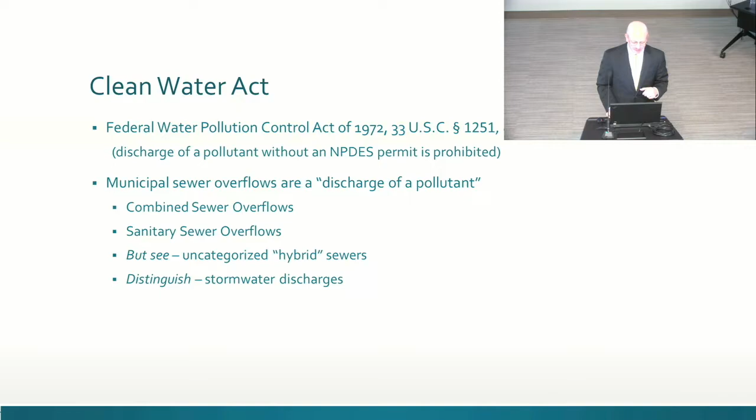Now, here's your homework, and you'll have these slides available to you. So if you really want to drill down into what the legal framework is for this, and you really have trouble sleeping at night, you can look at these documents. These are really the controlling documents for EPA in this discussion. The first was the 1994 National CSO policy that came out as a regulation from EPA, and the next year Congress basically elevated that into the statute of the Clean Water Act by saying all permits and approvals have to be consistent with the National CSO policy.

Combined sewer overflow. Okay, good question. Go ahead and bring that in there. You're going to hear CSO now all the time. The CSO is a combined sewer overflow. So this policy focused on those single pipe systems that are prevalent in all our old cities, again, especially in Ohio.

It was an idea of how do we come up with what can cities afford, how can they figure out what's the best level of control, how much control is enough if you can't keep all the stormwater out, because you can't, right? Mother Nature's always bigger and there's rains all the time and it's infrequent. If you can't keep it out, what should you do?

If you look at that document, you'll see there's something called a presumptive approach, which in 1994 was the agreement, or the way to say if you get to a certain number of activations, limited number of activations, or a certain percentage of volume that goes out, we're going to say you're in compliance and you're meeting water quality standards. So for instance, if you had 4 or less overflows at a particular CSO in a year, we're going to say that's good enough.

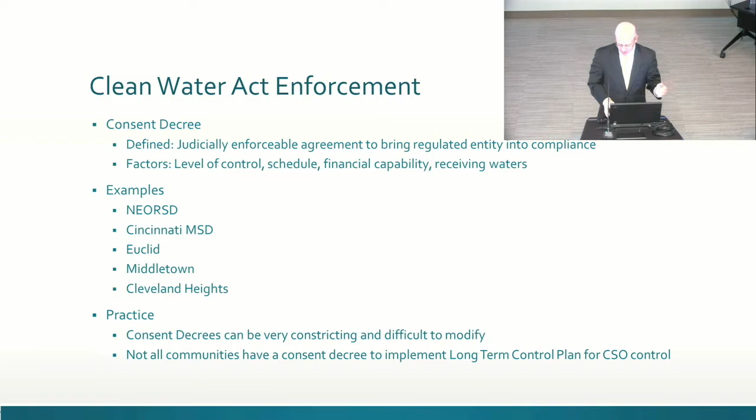Okay, so the route forward. This is critical. This is where the measured optimism comes in. We could choose to do nothing as a public, or just say EPA is going to tell us, but we're not going to like what they're going to tell us, right? They're going to take the most restrictive thing, the biggest projects, and the fastest schedule that they think we can afford. If we come up with a plan through this process, if we get your input and make choices about what we can tolerate, what we like, what our priorities are, then we have the possibility of being able to push back on EPA.

Public participation is very persuasive, especially to EPA and especially to a federal judge, if we're standing in front of one at the end of this process, which is where it may go. So there's really no ability to not play this game, or else we're not going to like the result. There's no ability for the community to vote present and rather not choose. Our route forward is to choose something that we can afford.

And we should all know there's no non-local money to fund these programs unless you have an integrated plan where you can take other infrastructure dollars and marry them up to street projects and water projects, which is what we're talking about. If we can come up with that kind of integrated plan, then we have an opportunity to have something affordable. So this is what we're talking about.

Today, that's probably several trillion dollars in cost to implement. So the issues haven't changed much. I want to emphasize how unique we are. A couple of key points to grab: it was not built as one system, it's an amalgamation of many subsystems built over many years. It was all built in a pre-World War II environment, so the technology was older, and the theory of environmentalism at the time was that the solution to pollution was dilution.

The pollution source was from our homes, and the dilution source was Lake Erie. So public health was the primary objective: diphtheria, cholera, typhoid. Anything they could do to move that water away from the population was a good day's work.

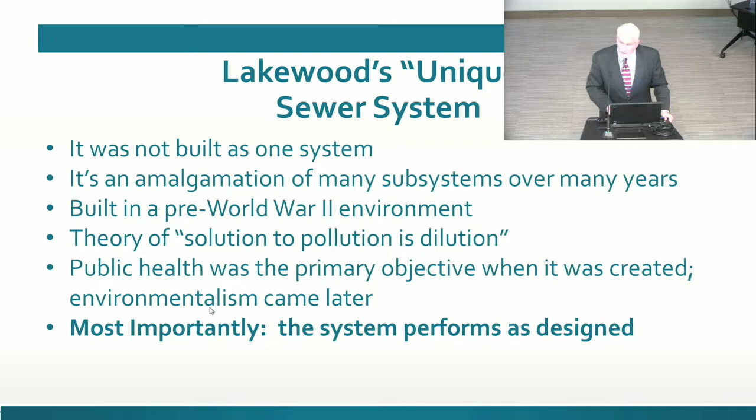Lakewood is actually on a hill. Lakewood Heights is about 55 feet higher than Edgewater Drive. They understood the geology of Lakewood and the opportunity to leverage gravity as a friend here, and they built a terrific system. That system performs as designed. From the day it was built until now, it performs fabulously. The problem is it's illegal.

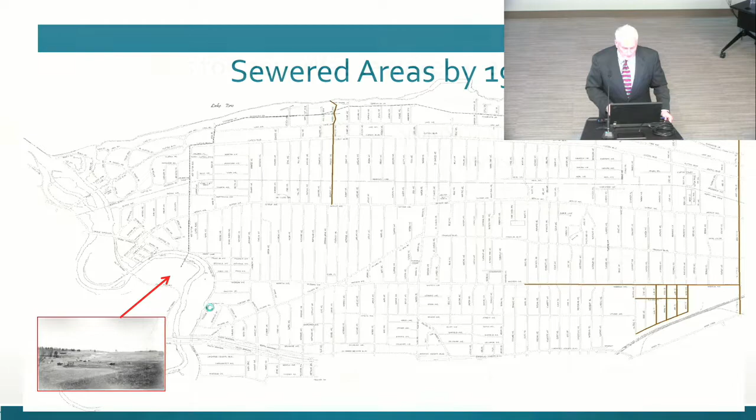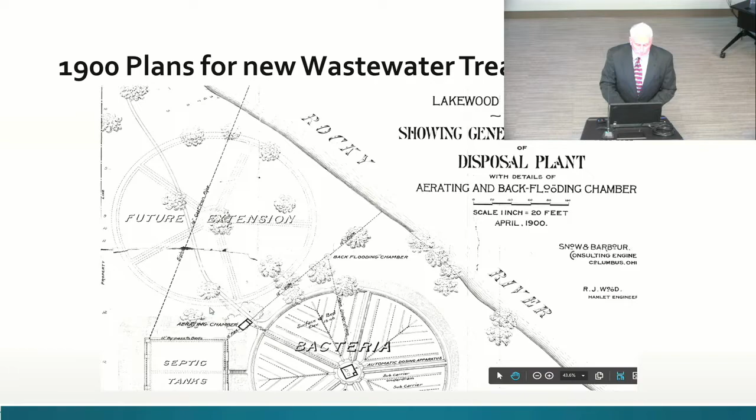So in 1900, they began to realize we need to direct this stuff somewhere, and they began to design what is now our waste treatment facility. It was basically a settling pond. Remember that gravity piece—the question is, how could you get it from high up on the cliffs of Lakewood, all throughout Lakewood, down to this settling pond on the banks of the Rocky River in what is now the Metro Parks. But all that started in 1900.

By 1910, Lakewood was booming, and you began to see some further extensions of this collection system. Again, notice they all go north to the lake and discharge into the lake. It was obviously using gravity. It did its public health job—it got the bad water away from the population.

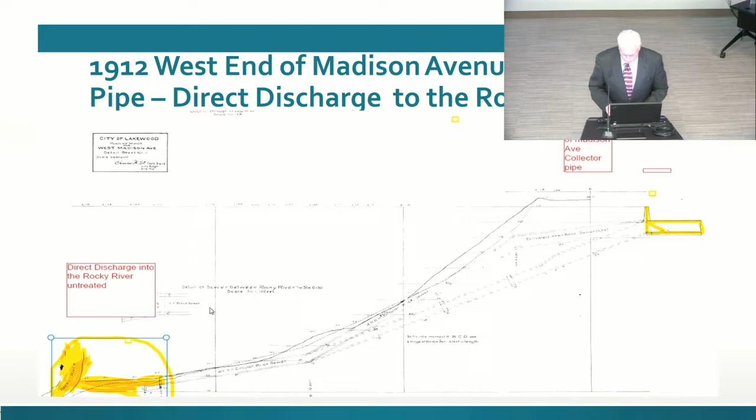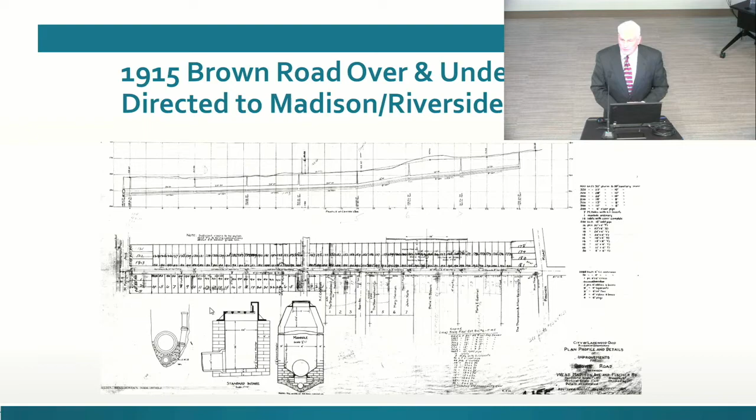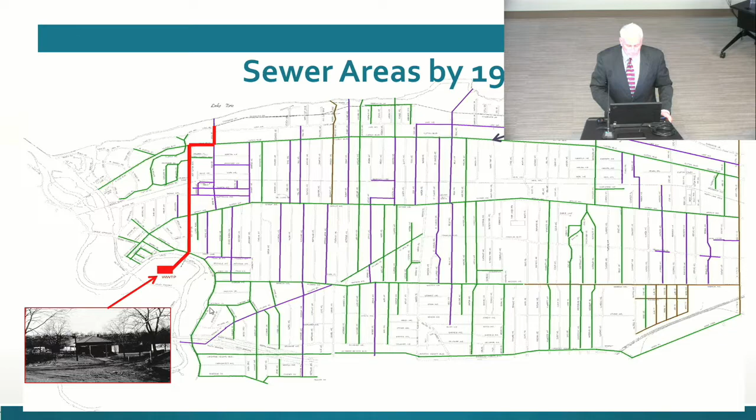By 1920, you can begin to see how things begin to change. That red line shows the first extension of our major interceptor—a larger pipe that begins to capture and connect what historically were a bunch of pipes that went to the lake. They tried to redirect it further west and get it to that plant that was substantially built, starting from the plant and working its way up West Clifton. The colors on this chart represent the tributaries of how water moved through the system—so green follows green all the way up through pipes ultimately to the lake from the middle, and purple likewise.

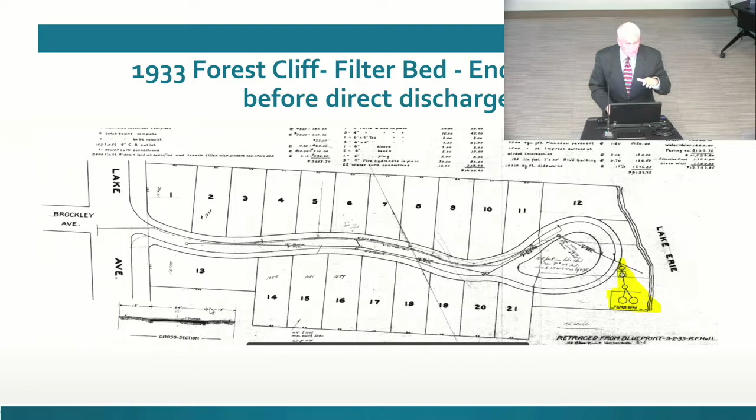So if you lived in 1933 on Forest Cliff, you basically sent your stuff to this filter bed at the cliff's edge, and they tried to filter out best they could, and it went into the lake, untreated. You had these little subsystems all around Lakewood, doing their own thing, achieving the objective of protecting population health, using gravity to get it away, but basically using our lake as our dilution source.

So by 1940, you see a much more evolved system. The interceptor is beginning to extend as well. And then by 1945, you see the final link to the interceptor all the way to 117th.

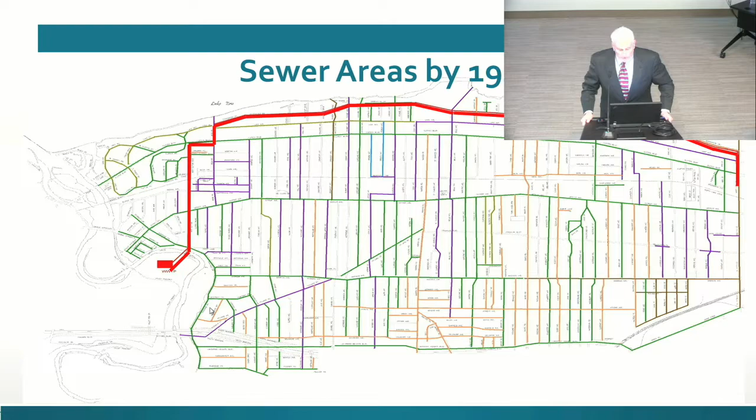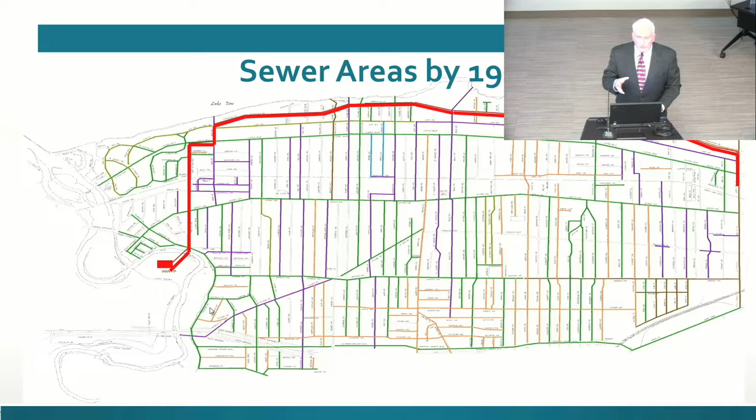So what happens today in a big storm is a drop of water, let's say a cup of water, that falls in Birdtown, by and large, may not ever have a chance of getting to our plant because all the water to the west of it is moving north and west. The whole system begins to fill up pretty rapidly, so a drop of water on the eastern end has no chance. The system is full. It's already discharging into the lake to the west, and that water in the eastern end of Lakewood has no choice but to head out to discharge points, generally along Nicholson and some parts along 117th Street, untreated.

Jim and I live on Wilbert, and our street has its own design issues, but they were built that way. So you get the idea that we now are forced to collect water every day.

Dry weather, by the way, no problem. We have the capacity to collect up to 10 times our dry weather volume, our everyday volume, like today. Dry weather day, no problem. Plenty of capacity in this system.

Our challenge is these big water events, and we know that they're happening more frequently. In fact, I just learned that there have been 27 500-year storms in the last 20 years. I think that's the right parameter. 27 storms nationwide, well, probably across the world, I think. A 500-year event is a storm that should only happen once every 500 years, that's how big it is. And we've had 27 of these in the last 20 years across the world.

So the idea of Mother Nature and her ferocity rearing its head, putting more volume into a system that's not designed to handle it anyway, under the best of conditions, when we have big rainstorms, complicates things. So today, the engineering to fix all this requires us to take a system that was not built as a system and figure out how we can take every drop of water that hits Lakewood under any condition, dry weather, wet weather, collect it, and then handle it responsibly. That's the challenge that the Clean Water Act gives to us.

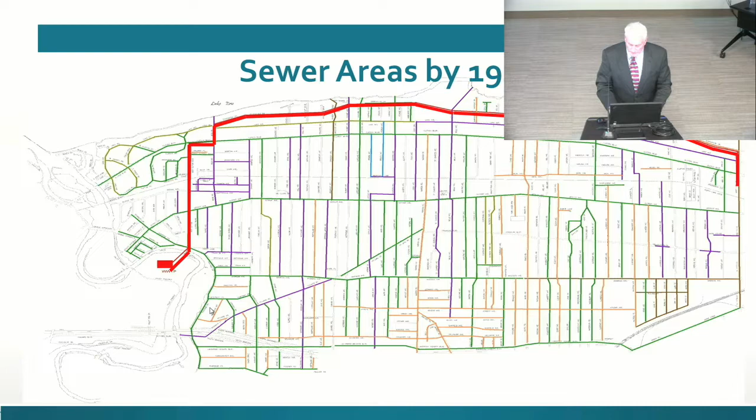And you can get some sense of how we deal with that. Now I show this as an example. This is the discharge set of pipes today at Madison and Riverside. Remember that simple pipe that showed up in about 1915? Well, this is what happens when you try and create a system that was not built as a system. You'd probably flunk a civil engineering exam if you said this is a perfect example of how we design a sewer system.

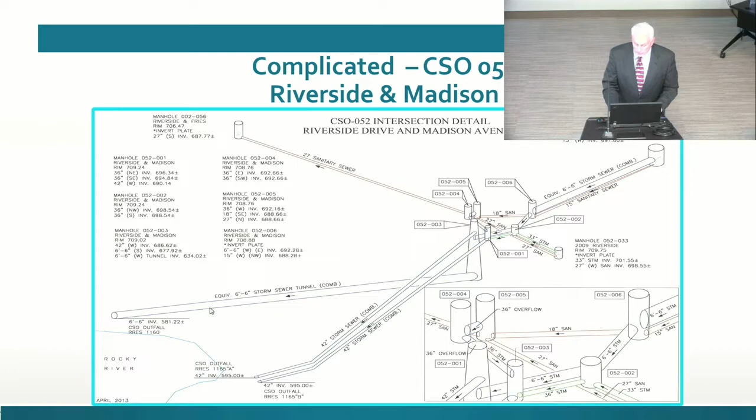But the fact of the matter is you have stuff coming from so many directions and so many different environments. You see this very complex connection to try and get stuff to the right place under the right circumstances. Everything's pretty compromised, and this is a good example of that. This particular intersection is one you're going to hear more about because it's a fairly large volume and it probably has some significant engineering options that we want to grow to understand.

So in the end, we have available to us a very narrow set of choices. We can prevent stormwater from going into our system, which is a function of basically diverting water into the ground the best that we're able. We can minimize its impact through bioretention cells, which we have all over the place, more green space. We can transport and store it somewhere else.

You see these big infrastructure tunnels being built. On I-90 in Bratenahl, they just completed, I think, about a 6-mile tunnel. I think it's 23 feet in diameter, or maybe 43. It's a very large tunnel, and it is basically a big storage tank. It's called the Euclid Creek Tunnel. I think it's about $300 million just for that tunnel. It has a very complex set of pumps because it diverts water that normally would go into Lake Erie into this tunnel while the storm is happening.

The storm goes through, and then they have to pump all this water out gradually and treat it in the normal dry weather occurrence. That's fine if you have plenty of time between the first storm and the second storm. But if there happens to be a second storm that comes along before you finish draining that tank, you got a big problem. You're actually discharging again. And the EPA has no sense of humor about these storage tricks.

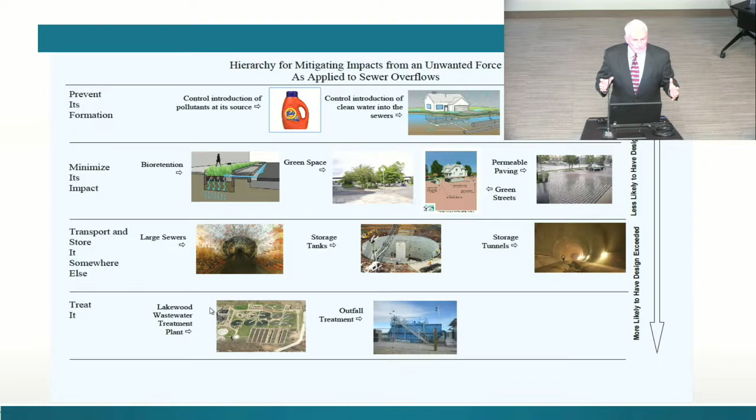So in Lakewood's case, we're challenged to get all our volume to the treatment plant because of all the restrictions in pipes and connections. And then we have the capacity of the plant itself. And we're going to begin to hear how we're going to deal with a lot of these issues.

So starting in roughly 2006, CT Consultants have been extensively mapping and metering, measuring, and modeling our sewer system. They have a very complex computer model that allows us to simulate behavior in different conditions in certain parts of the city. And that allows us to figure out which engineering solutions might work, what the impact would be by plan or by unintended consequences upstream. Do we create further problems?

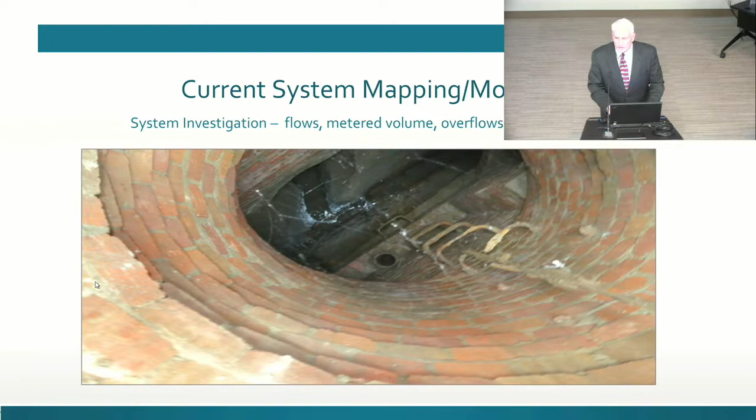Hydraulics, you'll learn, are a key point, which is the actual force of the water moving through the system, and the speed creates its own performance issues. All that is a function of understanding what it is we're doing. And the EPA basically said in 2006, you need to understand your system, and that we've done, and we're really able to measure that.

We've also launched the pilot study in the middle part of Lakewood, just south of Harding Middle School. And that was a pilot study to determine how we can effectively separate storm from sanitary at the household level. That's the source control piece you're going to grow to understand. So if we could effectively separate at the household level and keep it separated as it moves through the plant, that changes the nature of what the system can do.

You're actually allowed to discharge rainwater into a watershed. But once that rainwater is not rainwater, it's mixed, then it's a whole different conversation. So this deals with the question of, can we separate it successfully at the household level and keep it separated through the system, and therefore have different options as we collect it.

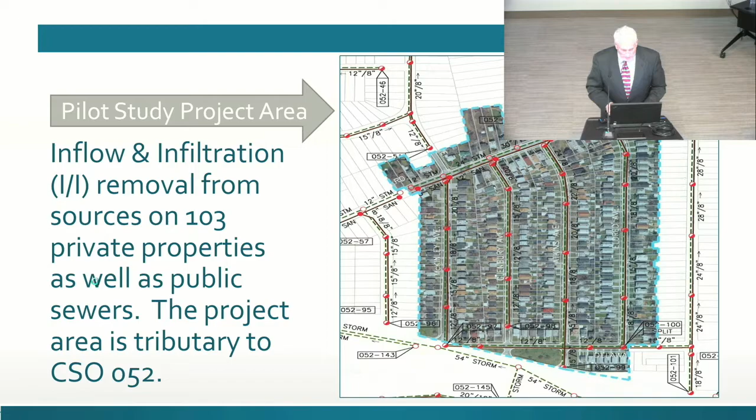We're at about 2.5 years in, field investigations, confirmation of cross connections at the household level. We've had public meetings, the cost of it. We have all kinds of complicated issues that help us understand how we can be successful at the household level or not. We actually believe there's about 7,500 houses in Lakewood that need serious work at the household level.

And so we want to understand what the engineering of that would be, what the cost would be, and how we would manage such a job. And the pilot study is part of that, and that'll be baked into our ultimate recommendations. You see examples of green infrastructure. That's another term you'll become familiar with, and that's where we divert the water into the ground.

You see examples of Madison Park in this case, also in the parking lots behind Geiger's and First Federal. Those are designed to use permeable surfaces to capture water and get it into the ground. Those little brick pavers that are there are actually spaced, and the kind of material that's underneath them allows water to percolate through and get into the ground instead of going into the sewer system. There's also some bioretention devices at the lower ends of each of those parks or parking lots.

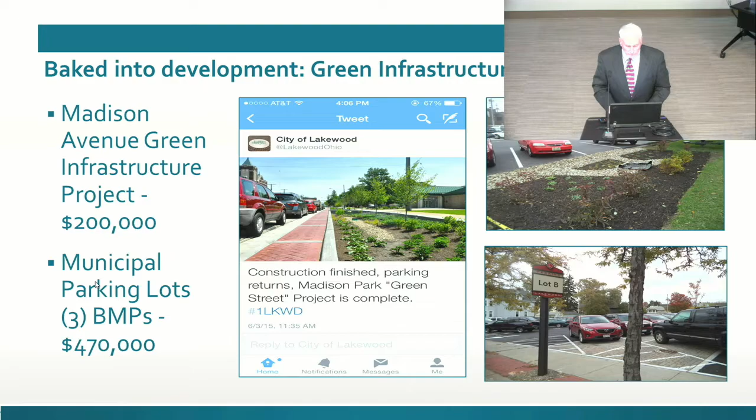So McDonald's, every example of a commercial redevelopment we have in Lakewood now features green infrastructure. So you see an example in the back of McDonald's is a bioswale, and it's designed to capture all the water coming off that roof and the concrete surfaces there. You'll see those examples all over Lakewood now. In fact, at the new Family Health Center, in that parking lot, you'll see permeable surfaces. That's one of the primary features there.

So the fact of the matter is, as we start each day in 2018, we collect and treat about 10 times our average daily dry weather volume.

Dry weather is an important concept. That means we don't have any rain trying to infiltrate the system. That's just our normal stuff. We turn on our tap water, we run our washing machines, we flush toilets. We basically are bringing that water into our houses, we're using it, and we're discharging it into our sewer system. That's dry weather flow. And we have the capacity to treat 10 times that volume.

So we can have little storms all the time. We do, no problem. Our system can flex, and it does. So today, we treat 85% of every drop of water that hits Lakewood in any condition.

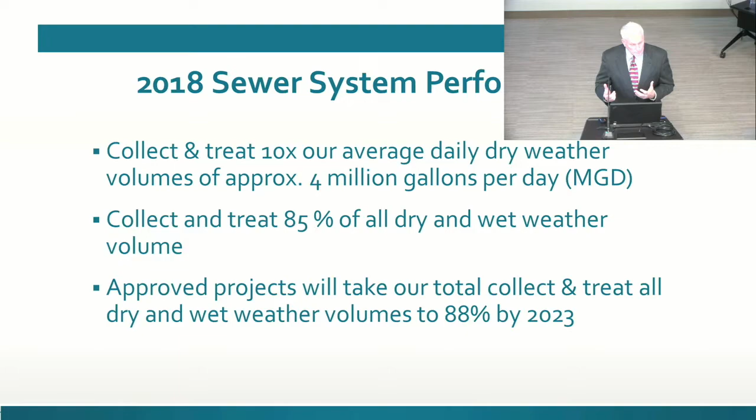We've approved a project. City Council just passed approval of an addition to our treatment capacity that will improve our volumes of collection and treatment to 88%. And that's a high-rate treatment, and that will be online roughly in 2022, I think. Fact is, we've spent $60 million in the past 10 years alone that have moved the needle from 79% to 85%, ultimately to 88%. And you've got the items listed there.

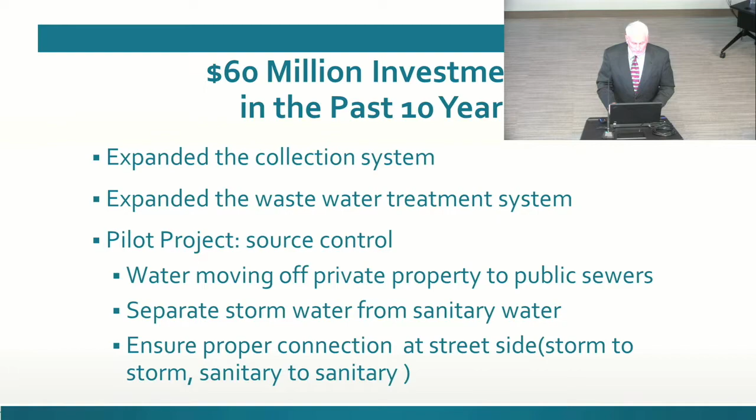We've expanded the treatment system. We've expanded the collection system. We've got the source control system that's helping us in measurable ways. And we're about to add this $23 million high-rate treatment.

Bids just went out. Bids came in slightly less than we'd forecasted. That's good news. The engineering has been built, and now we'll begin the expansion of that, and it'll take us a couple of years to build this.

So somewhere around early 2022, that comes online, and that will divert a sufficient volume that will move us to the 88%. As Lou has helped us understand, there are many, many cities across the country that are under consent decrees with a goal to get them to 85%. So part of our story, and you're going to help us tell this story, is the fact that we have worked hard to get to where we are.

We've made good faith investments along the way. We've had effective investments. We have more to do. We accept that responsibility of being good stewards to our watershed. We need lots of time to make these because of the burdens of cost, and we need flexibility, as Lou pointed out. And whatever regulatory restrictions they put on us, they must respect our affordability, and they must respect our need for creativity.

And that's part of the mantra that we're going to be pounding away at. And while we're prepared to identify that we understand how to manage this system with new improvements, it's a challenge to us. In addition to our sewers, we've also, over the last 12 years, made $19.5 million worth of drinking water improvements.

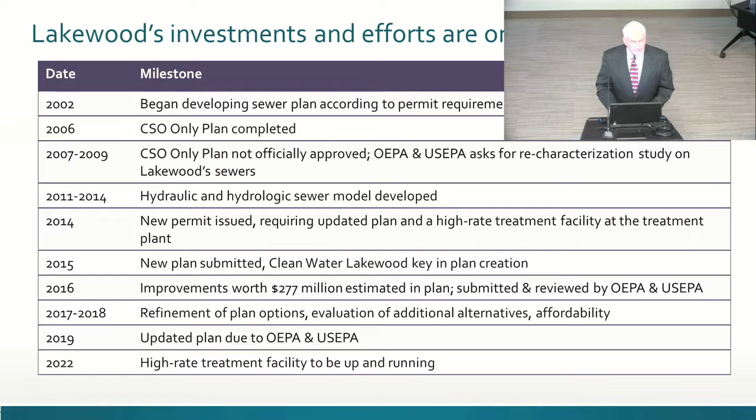Because we've already taken on a new $23 million one, this high-rate treatment facility. And it's a good one, but there are many other projects that you will grow to understand in a moment that are looming, and how we factor that into our plan is a big part of the challenge.

So I'm going to turn the podium over to our engineers and scientists, Julia and Mark from CT, and they're going to share the engineering options, costs, and factors to be considered.

Jim? What percentage of properties do you think have commingled storm and sanitary on their properties before it ever gets into the city? That's a great question. So in Lakewood, my house built in 1918, pretty hard to trench. It's built on shale, as is yours. Many houses put one pipe from the system, from the house, so they combine it at the house, which is what Jim's pointing out.

The other element that's part of that, though, however, is in a common trench, where your sanitary is at the lowest level, your storm's above it. Over 100 years, my house is 100 years old, there's an enormous amount of leakage between my storm pipe and the sanitary pipe below it.

So even if there are two pipes, you can get what they call I&I, it's about infiltration of stormwater into the sanitary from a leaky system. So part of our pilot study was to understand the implications of how you take an old system and make it not leak, so that even if it's designed properly, you don't have infiltration.

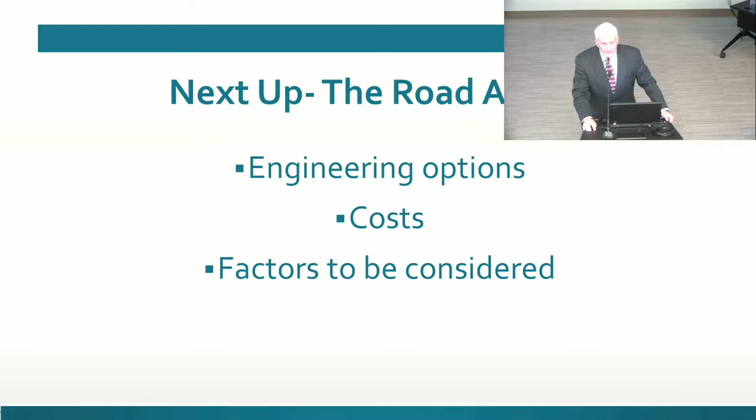7,500? The homeowner's responsibility. Yep, it is the homeowner's responsibility, and that's another interesting conversation. There's an equity question, there's an affordability question at the homeowner on the homeowner side, not to mention the public side. So we've got a lot of challenges here.

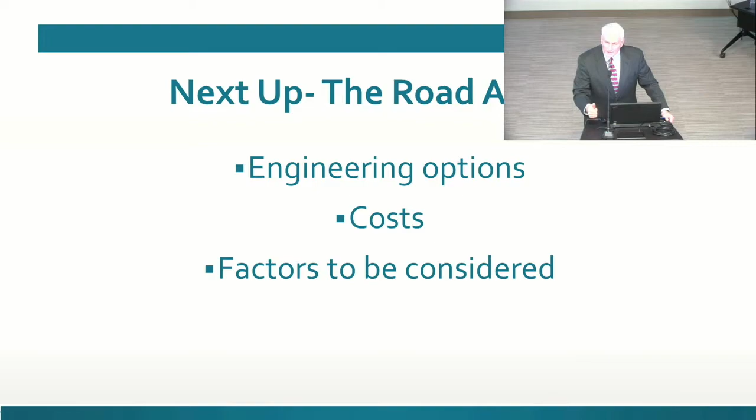So I'm going to turn the podium over to Mark and Julia.

I think first, just to acknowledge this process to this date and compliment the mayor and the city staff and administration and everybody in this room. As the engineers at CT and Brown and Caldwell, we go through these projects, and not for all of them are there rooms like this.

The mayor was talking about firepower before, and this is going to be extremely important moving forward. So getting your buy-in and helping others get educated who aren't in this room is going to be important in the coming months. I'm going to try to keep this at a high level. Obviously, with the engineering behind it, it can get very detailed, especially with the complex model. We're going to work through that detail more so in the November 15th meeting. But right now, we want to talk about some concepts and the overall process to this point.

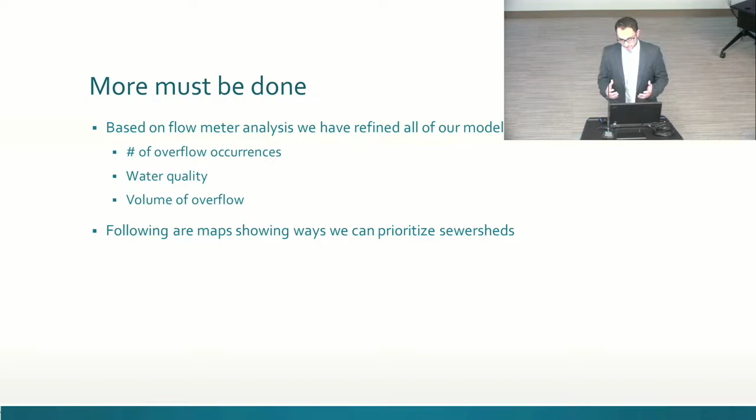As the mayor's mentioned, more must be done. We've collected a lot of data over the past 2+ years, and we're at a point now where we're using the model that we've developed. We continue to refine it, but we're starting to be able to look at things and prioritize different sewersheds, and start to look at different alternatives. So some of the maps I'm going to show you here are just examples of that. As they continue to change, they give everybody in this room a sense of where we're headed.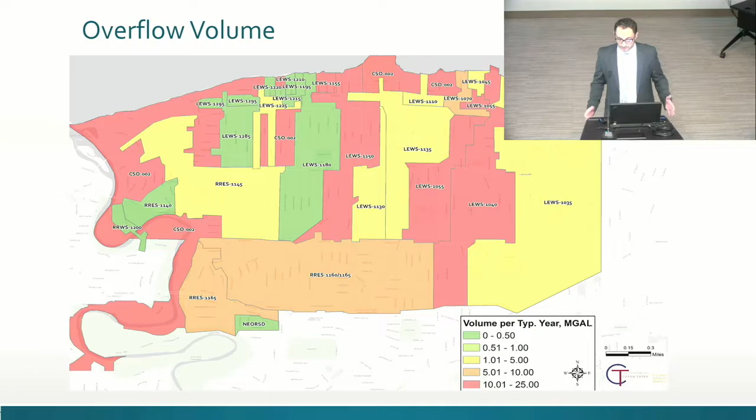This first map is explaining overflow volume by sewer shed. Those with red values have higher overflow volumes. Those with green values have lesser overflow volumes. This gives us an idea of, volumetrically, where we're losing flows from this system. There's a complex network of pipes behind that, but those are really the sewer sheds that we've identified within the city.

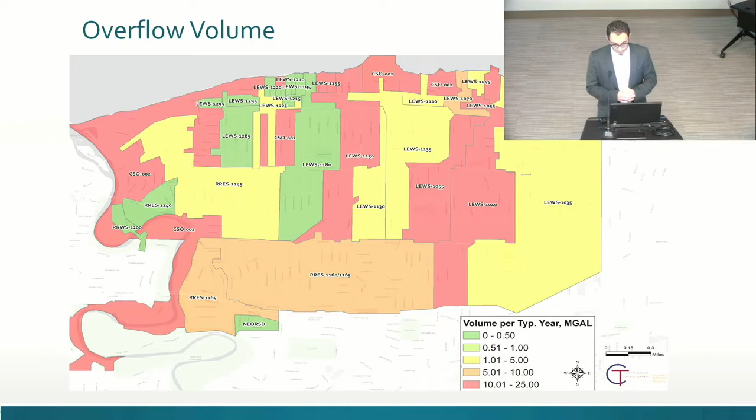Just to follow up with this one, there's identifiers on each of those sewer sheds, and you'll see that in a following slide, but we've generally tried to come up with alternatives and costs for those alternatives, and we relate them back in most cases to those identifiers that you're seeing up there.

We've developed alternatives over the past, I want to say 2 years. In 2016, we actually submitted a Phase 1 report that we'll get into in a minute. In this 2019 report, we're also going to develop an implementation schedule and understand if we do projects A, B, and C, when can we do them? How quickly can we do them in conjunction with the cost of them? How quickly can the city pay for them? And then that gets into the affordability analysis that will also be a part of that 2019 report, which Joe is going to be talking about shortly. Within that are the financial capability assessment and also a sewer rate study.

So in 2016, we met with Clean Water Lakewood task working groups, and we sat down and started identifying potential alternatives. In that phase, years ago, we started to gather public input and get an understanding for the flavor of the types of alternatives the city might be interested in. We took those recommendations and modeled them with the data we've collected and the model we've built, and tried to estimate and understand how effective they would be. We reported that back to those working groups. That was a key point in Phase 1 of this integrated wet weather improvement program that the city's undertaken. We want to carry all those concepts forward, and we have, and we've tried to refine upon them as well.

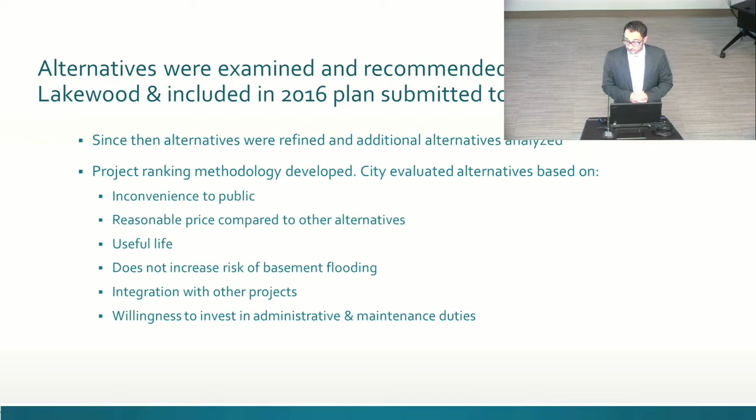Okay, technologies used to solve overflow problems. We'll get into these in more detail, but green infrastructure, gray infrastructure, and source control.

Green infrastructure is reverting back to the natural processes that were in place before things got developed and we put all this concrete in. We want things to slow down. We want the water to infiltrate and really never get to the system.

Gray infrastructure is what you see. Mayor had some pictures up earlier. Tunnels, treatment facilities, new larger sewers to store, convey, and treat the wastewater, the stormwater, which potentially is contaminated depending on where you're at in the city.

Source control, this was what Mayor had also started getting into about resolving the leakiness that comes with the age of these systems and preventing stormwater from getting into the sanitary sewer, which should not be doing anyway.

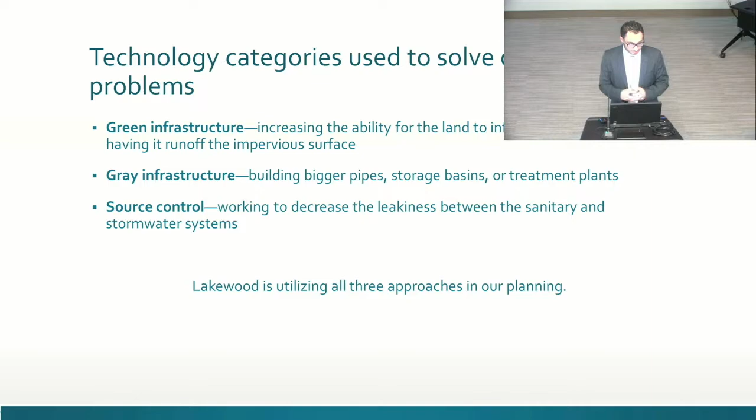All right, so this is a slide that is preliminary in nature, but it shows some of the work that's been done to date. In the left-hand column are the overflow sewer sheds that you saw in the previous maps. You'll see them again on the next one. This is a matrix that identifies what some potential pieces of the puzzle may be.

And if you look at the second column, it's approximate outfall location. We don't want you to think that's the only location that these technologies would be employed at. It's really the point where the outfall is, so it's a larger sewer shed contributing to that point that these technologies would be employed throughout.

So just to go through some of them and get your mind set forth on the November 15th meeting: storage tunnels or storage facilities, source control, which we talked about, fixing the leakiness, and sewer separation, when you have a combined sewer, you have the option to put in a new separate storm or new separate sanitary pipe in addition to that one.

So then, essentially, in that sense, you have a two-pipe system, both with dedicated uses, one for sanitary, one for storm. Relief sewers are put in place to transport the flow that right now the system otherwise can't handle, down to either a storage facility or the treatment facility.

Regulator updates are typically smaller modifications made to the existing system where flows go a certain way because of a weir. Maybe we can improve that weir and keep the flow in the system.

HRT is high rate treatment. One of those is being built. Diversion sewers redirect the flow over to a different sewer shed if the one they're contributing to right now is overwhelmed. Aerial sewers, you've already got some of these down near the plant, but it would essentially allow us to get more flow to the plant and to an area where we can treat it. And then additional pump stations.

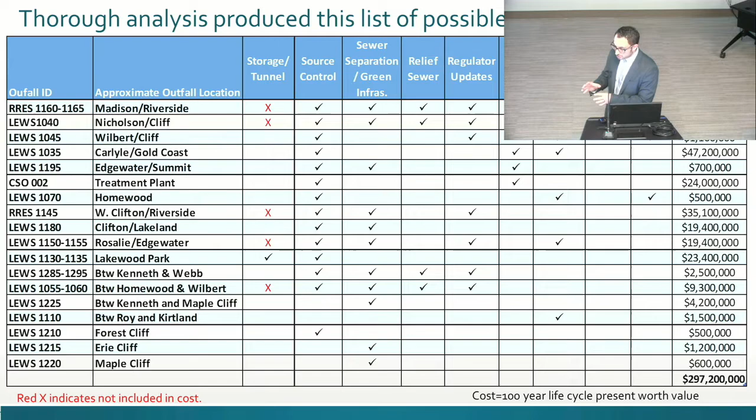In the case of green infrastructure, for example, when you put those features in, they have a lesser useful life than some of the gray infrastructure. So when we plan out over 100 years, are you having to replace that facility at the 50-year mark? Those costs are all incorporated into this 100-year life cycle cost.

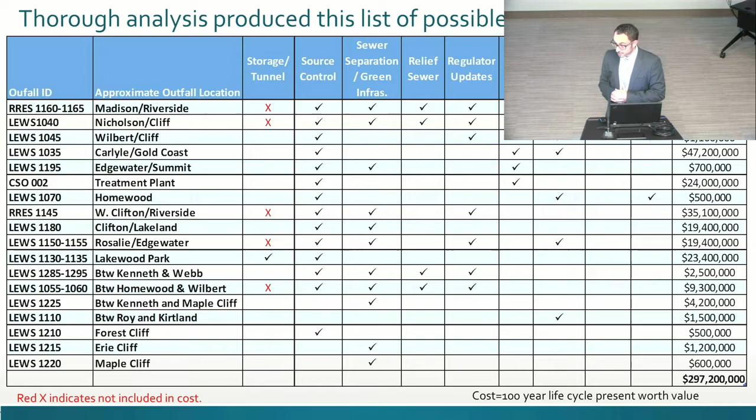So we're going to work to refine those, but we also want to get input from you so that we make sure we're going in the right direction. I'm going to turn it over to Julia now.

Hi, all. Good to see some Clean Water Lakewood folks from a few years back. So yeah, my background is in science, environmental science, and I'm also working on helping Lakewood comply with all of their Clean Water Act missions.

But so first, one of the common things that you'll see here is a lot of source control check marks in those boxes. So we're going to talk about the source control pilot study.

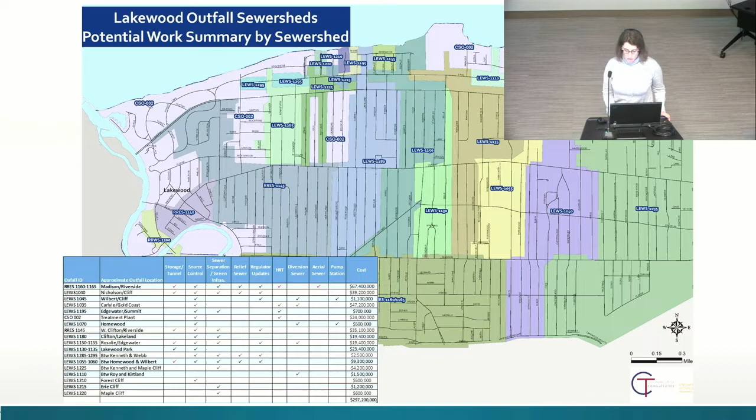Here, you can see this table is relevant to the outfall IDs that are also listed per sewer shed in this map. So in the November meeting, you guys will be working in small groups, talking about alternatives within these sewer sheds in more detail.

But talking about source control, private property work may be part of the solution. Source control is really about how do you not have sanitary sewage mixing with stormwater on private property and going into the right-of-way on the main, in the streets.

But so the main goal is to reduce the rainwater from entering the sanitary sewer. The reason being is that we don't want to have stormwater entering the sanitary sewer. Then when the sanitary sewer is at capacity, there's an overflow. Those overflows are what's not legal, versus stormwater, which is totally fine. So we don't want to have it mixing.

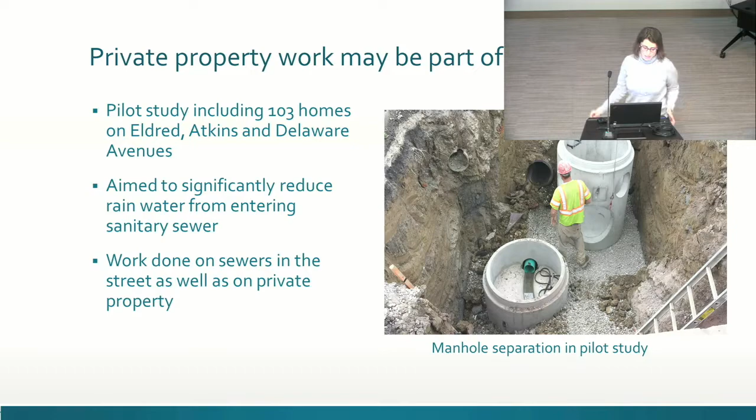This is a picture of a home and the work being done on the lateral in the front of the house, as you can see. So there was the first phase where we did a lot of work and we learned that the pipes are often clogged and cracked. Some of that you can get rid of by flushing it out, and we also relined the sanitary laterals. But we learned that even if you do, there was still leakiness between the storm and the sanitary laterals. We also learned that water from the rooftops often ended up in the sanitary sewers.

So for example, this shows in the blue all of the stormwater from the roof going down and then around the perimeter of the house in the storm drain that goes down to the lateral. But we also see that basically those pipes are old and leaking, and they leak into the sanitary lateral underneath.

So we had lined in phase one the first part of the lateral from the right-of-way down to the house, but not underneath the house. And there were still plenty of areas where stormwater can get in underneath the house and start draining.

Yes? What material are these pipes made from? So there's a variety. Most homes are older, and so clay pipes are common. There's some iron pipes. Newer ones are PVC pipes.

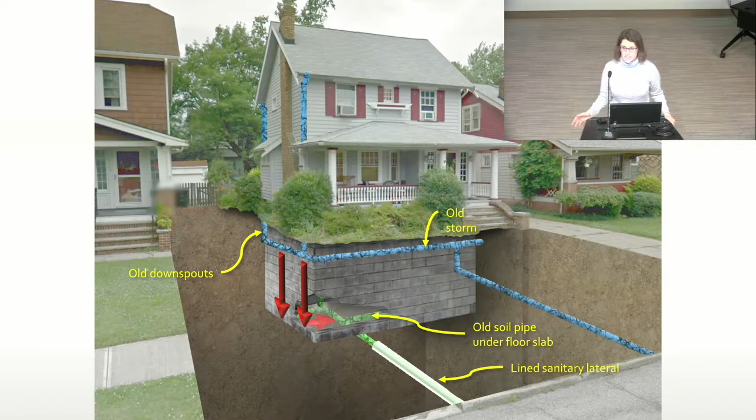So what we learned is that for phase two, what we're getting at is replacing the pipe that has all of the stormwater coming off of the roofs and going around the perimeter of the homes, replacing that pipe and making sure that's not leaking down into the sanitary lateral.

So we cleaned the laterals, we relined them where needed, we're replacing along the perimeter to make sure the stormwater from the roof is not getting into a leaky pipe, and then we're making sure the driveways are also connecting to the storm sewer, and if needed, a sump pump to be installed.

This was less common than expected, and there were only a few sump pumps installed in that pilot study, maybe 3 or 4, so it was less than anticipated.

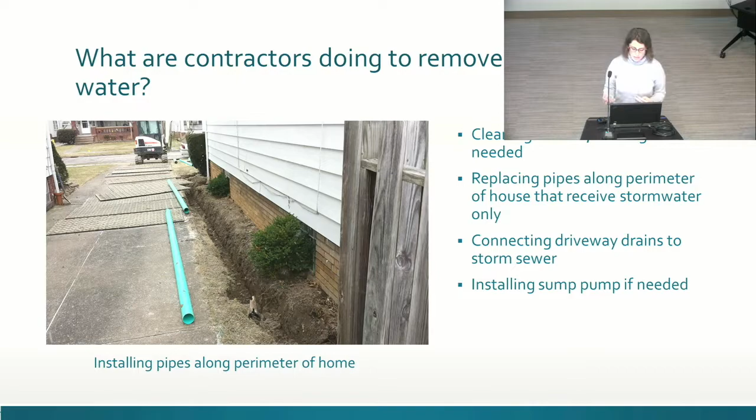So the goal of this study is to try and understand, one, is it effective? Are we reducing flows enough to actually reduce the combined sewer overflows coming out of Lakewood? The first phase showed around a 30% reduction. We were looking for a lot more.

That's why we did a second phase, trying to remedy all of the leakiness that we saw after doing some further dye testing after phase one.

So if this shows success and we're able to get to a much larger percentage of stormwater not interacting with sanitary water, then does the public even want to go down this path? What are their interests, and what do they perceive as too inconvenient, or is this better and more sustainable than other larger pipe infrastructure projects?

And also, we're just trying to learn what works best. We learned a lot from phase one going into phase two about all the efforts you need to do on private property, and investigations that need to be done to make sure, like we're saying, perhaps you don't even need to worry so much about the sanitary line and more just focus on your work on the stormwater line.

And also learning more about the pricing. Is this the least expensive way to solve the problem? And if it is the least expensive way, does that make some of the inconvenience of it more palatable?

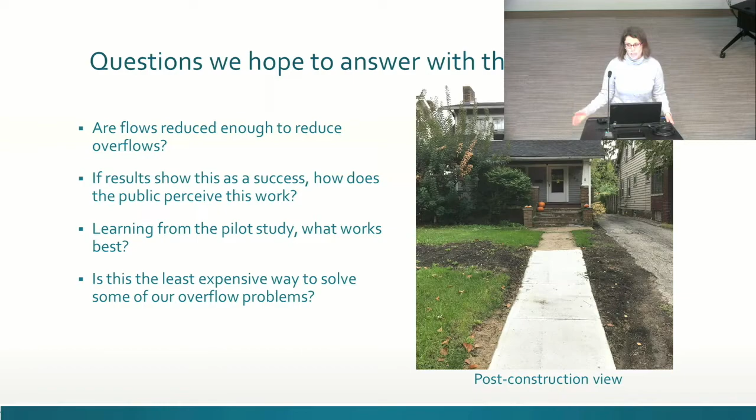So as you can see, your engagement is key on this issue because it will affect a lot of us. So November 15th there's going to be a meeting, and that will be more small group work sessions. And then there's also December 4th and January 16th meetings.

And right now, Joe will be talking about moving on towards affordability. Oh, yes, sorry. Go for it.

You said there was a 30% reduction from phase 1. Do you have data on phase 2 yet? No, because the construction's not complete. Okay, so once that's complete, the flow meters will go in, and then we'll be able to give you more data.

On the stormwater side, how many different watersheds are in the city of Lakewood? I assume there's at least 2, maybe more. And I guess the real question is, is there any stormwater burden from outside of Lakewood that comes into Lakewood? So in a natural environment, we really are just in the Lake Erie watershed, just draining to Lake Erie. But sewer sheds, which are man-made... Yeah, I get watersheds, there's plenty of those.

So that kind of map, like here, just to your right, you'll see the map of the colorations. That would be all of the sewer sheds. So there's probably 15 or more that you can see.

So those are all the sewer sheds, and we certainly do have water coming from outside influences in some ways, mostly underground. So all the stormwater that maybe comes from places south or west of us, or east of us—I mean, everything west kind of just goes into the river anyway—but those might fill up the pipes that we also use. So sometimes there's sharing of pipes between communities that would maybe be filled with somebody else's stormwater before we're able to fill them.

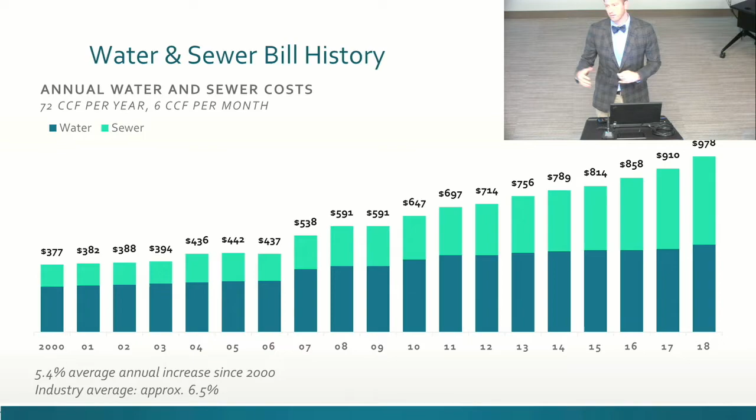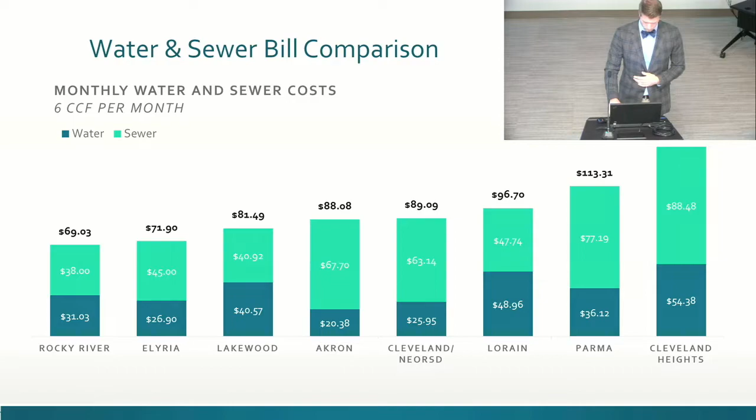The challenge is, we don't want the $81 that a Lakewood customer pays to go up to the $142. We don't want the EPA to say, well, if Cleveland Heights can pay it, so can you. So we need to be very careful and aware about that, and we want to understand your reactions and thoughts on what is favorable, and how we want to compare to our neighbors. So how do we measure affordability in terms of these hundreds of millions of dollars in investments?

That's a big number, and unless the city wins Powerball tonight, we can't afford that. Lou mentioned the 1997 Financial Capability Assessment - that's this big framework. A lot of it doesn't make a whole lot of sense and doesn't provide a great way to measure affordability, but the one thing that comes out of it that most people reference is this sense that a community would be highly burdened if their wastewater bill, or their share of the costs, exceeds 2% of the community's median household income.

So when half of your community - that's the median, 50% of your community's income - if 2% of that is directed to the wastewater bill for those compliance costs, that's considered a high burden. Right now, Lakewood is at 1.3% for that typical bill level. So we're not there yet, but when we look at some of these long-term costs, we'll see how that changes pretty dramatically. The 2012 update gives us some leverage, and we'll be working with the team to craft that message clearly.

Affordability is a major concern, and we can look at a lot of unique local conditions to help make that argument - income distribution information, unique demographic and economic characteristics of the city - to help us make our case and get a much longer time period to make these investments in our system. Instead of just using 2% of the median, lots of new approaches are coming out in the industry - it's a hot topic. Folks are trying to figure out a better way to measure it. Some people look at the hours of minimum wage it takes to pay your water and sewer bill, and there are other ratios that look at local housing costs and energy costs to come up with an affordability ratio. We'll be exploring all these things to strengthen our argument.